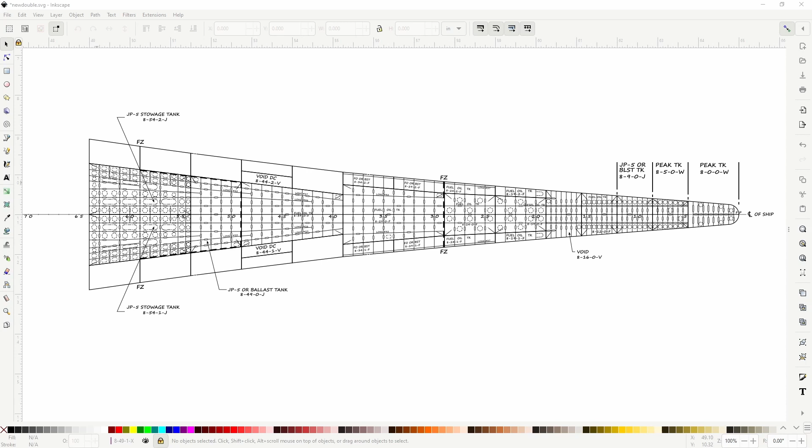The new objects are looking good. I really like the way the space pointers look now, so you can see where all the spaces are pointing inward. I've identified longitudinals now that are coming in, which is something I skipped on my original draft.

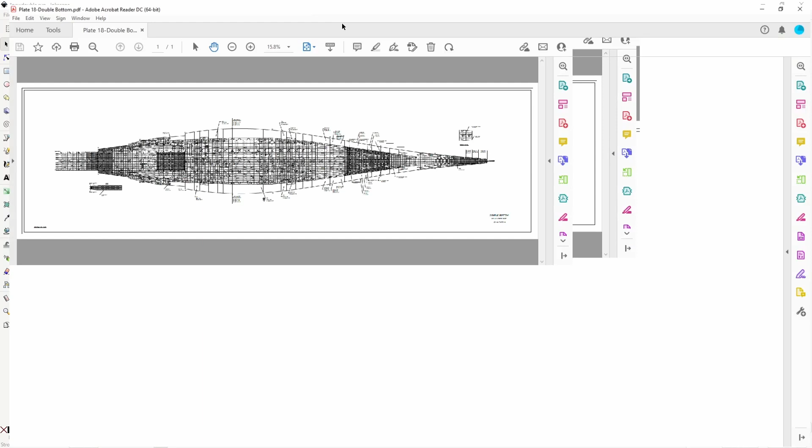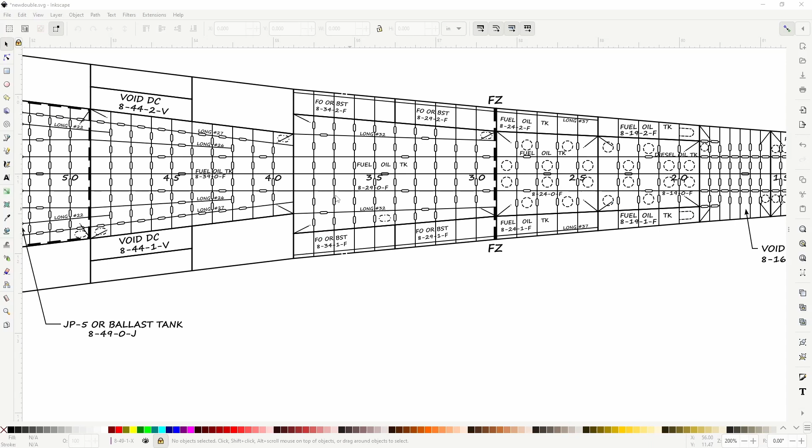If you take a look at the original draft right here, you can kind of compare and contrast - there's no longitudinals. These are kind of cattywampus because the way I put them together was a little, I'd take a line and just stretch them out, and it didn't look very good. The new version here looks a lot more clean. These actually stray down in a line, which is nice.

Of course, the plates, the lightening holes, and the access ways for the JP5 is here. One of the things I do want to share, though, is because these plans were declassified, there are certain aspects of the plans I think that are interesting.

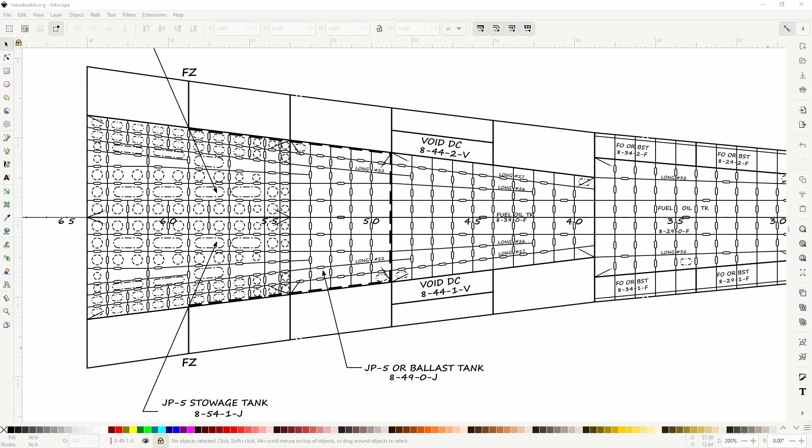When I was working on the blueprint, copying from the original, I noticed - I'll show you in GIMP real quick - I noticed that the colors sort of dictate, I don't know how well this is going to show up on YouTube, but you can see there are places where it appears to be whited out. You can tell they've covered some parts of the ship, pointers and stuff. You can see where the arrows kind of go in.

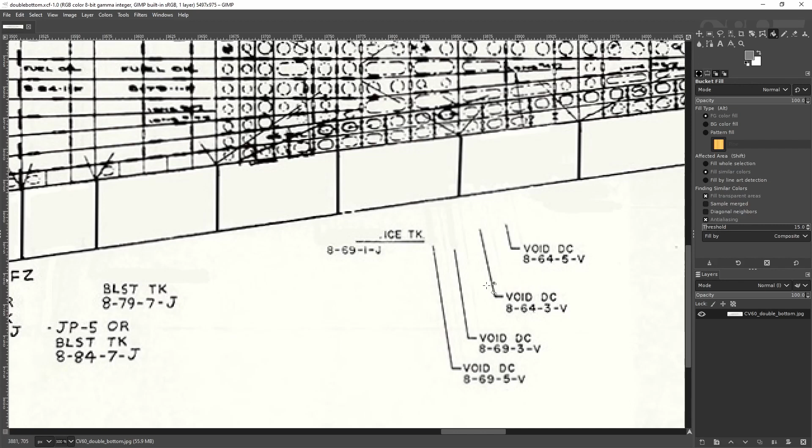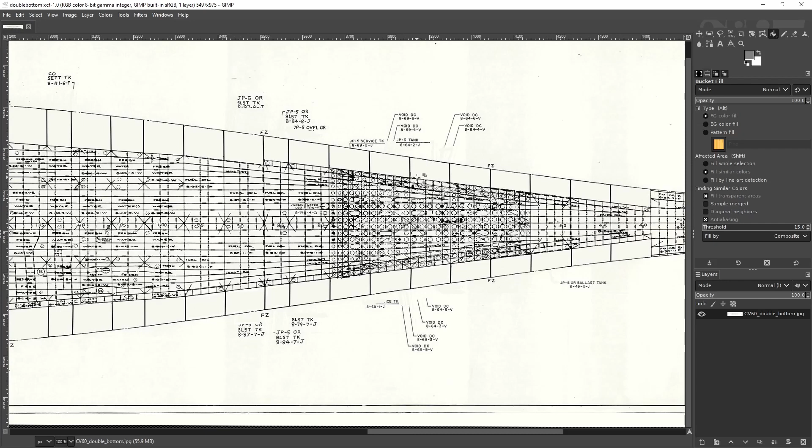So there's more data here than what's showing, and it's probably pointing to these big blank areas that I like to call phantom spaces. They've been painted out, redacted, and the reason why is most likely because the ship in question has an armor belt around it, and they still make carriers with this armor belt on it.

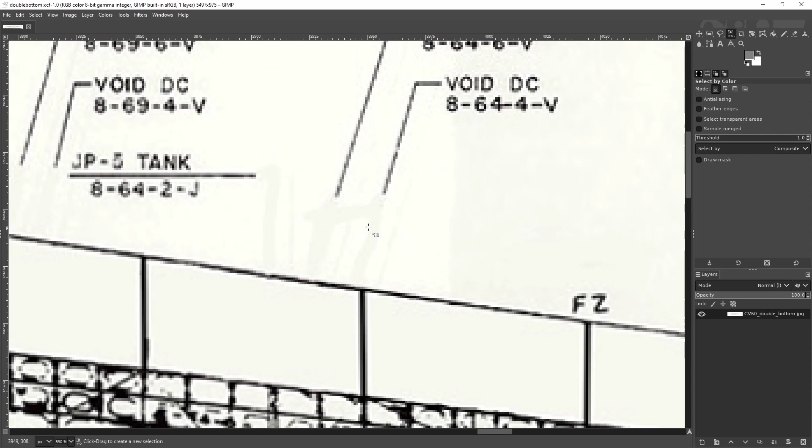So it's not going to be real conducive to show how the bottom parts of the ship underneath the waterline are armored, to give that information out. But what I thought was cool was while I was looking at this, I noticed - it might be hard to tell - you can tell there's lines that are getting cut off and going into the system, or going into the ship. I decided to try coloring this off-colored whiteout, to see if I'd be able to see what has been redacted. And if I do that, you can actually see, yes, there's all kinds of stuff.

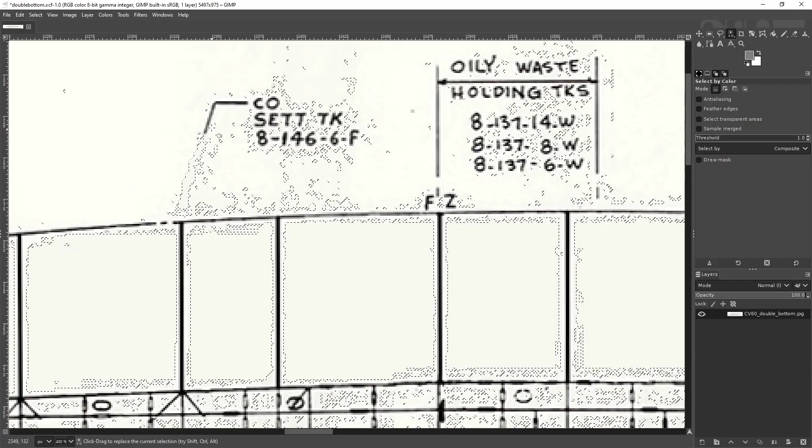It's like all these spaces have all been redacted, all been painted over. You can see here where the arrow came inside and was painted over. You can see all the spaces down here that were painted over, the arrows here. But one of the things I also found out is there's supposed to be something written here which is gone.

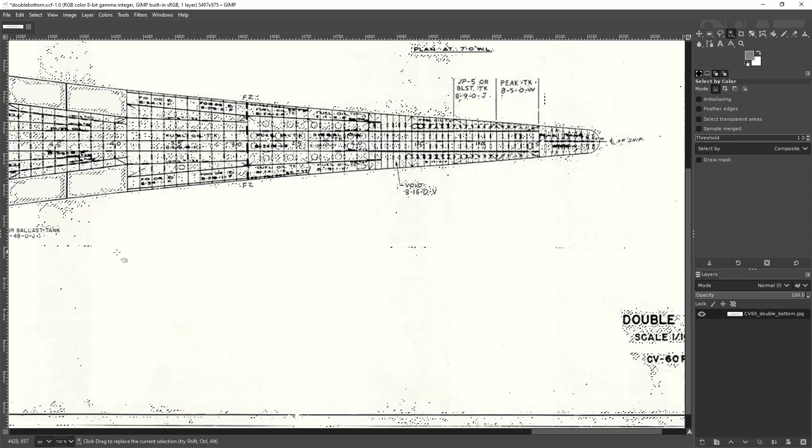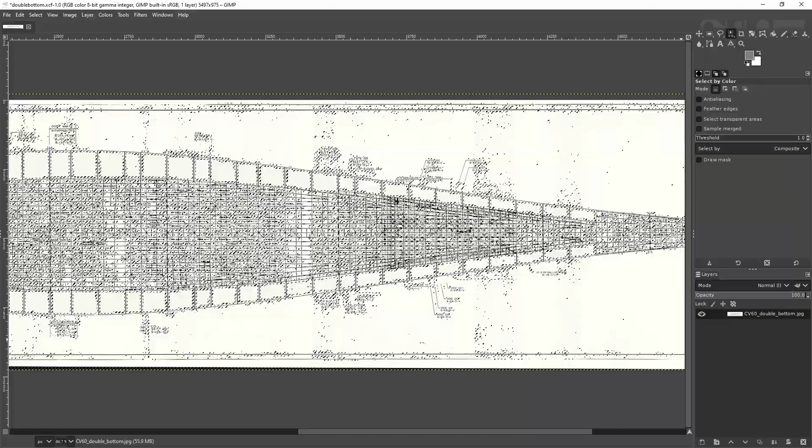What's cool is you can also tell that this over here has some sort of data sheet which is missing, most likely a list of spaces, but that's kind of cool to discover. There's something written here. This was a neat thing I discovered when looking at the double bottom - you can actually see where all the spaces are that have been removed from view. I kind of want to put some of these back if I can find out what they are. For example, if you look at the damage control plans here, they also show the phantom spaces too. These are just unlabeled, so you don't know what's inside them.

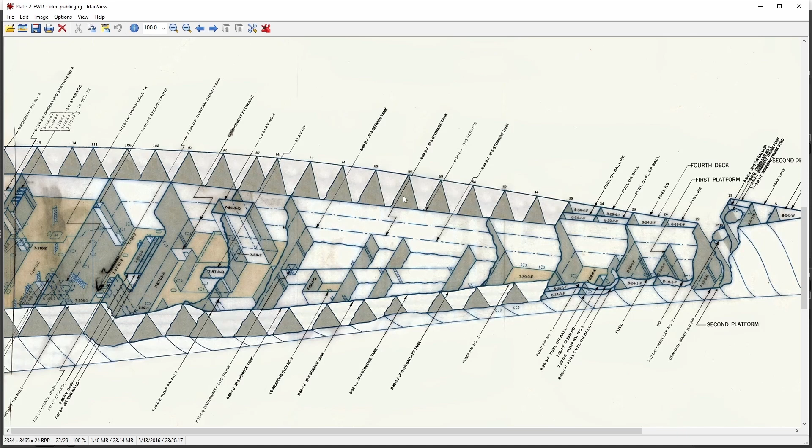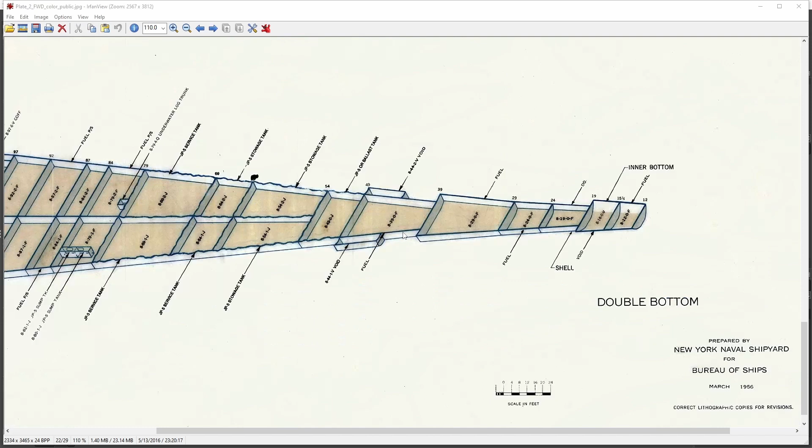This largely matches what is in the deck plans themselves. However, from time to time you can see a space poke out. For example, even though on the original blueprints this right here was voided out, this 8-44-2-Victor is actually in the damage control plans here. So I popped it in - it seemed rational to pop it in there. But still, it's kind of an interesting little discovery I thought I would share.

Other than that, let's see what other stuff I've come across.

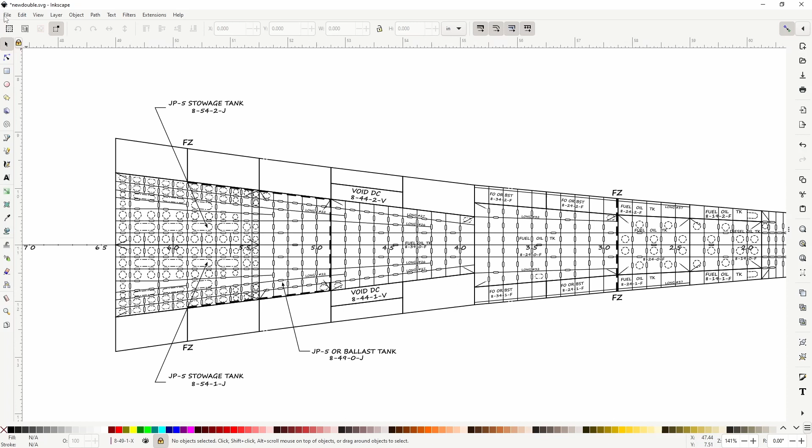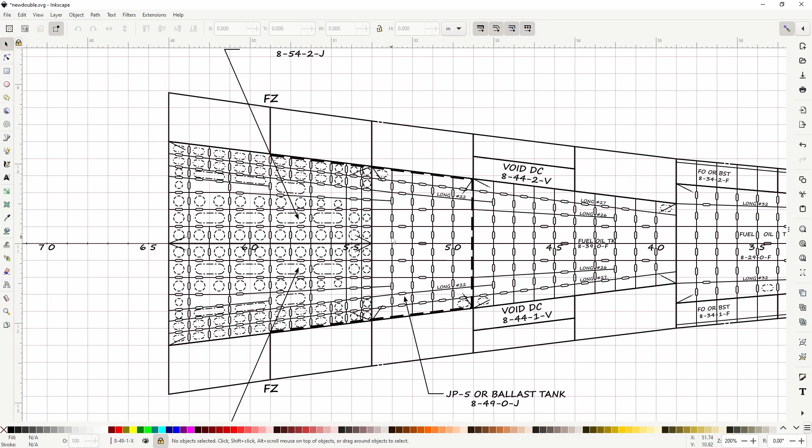Another thing that happened is I nearly screwed up my y-axis again. If I turn on my grids here - this is the longitudinal one that I messed up the scaling on the first time around. Almost messed it up again. I originally calculated the space between the longitudinals here as being 3 feet 4 inches, and it turns out that it's actually 41 inches, 3 feet 5 inches. I don't know why 41 inches is what they chose, but having it 1 inch short, I was actually running out of space in the ship.

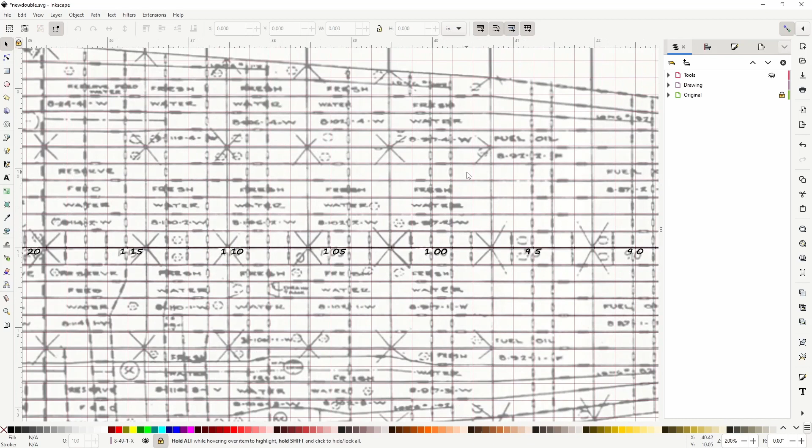So on the edges, they were going more and more out of whack. So if I pull up my original here, you can now see that the longitudinal outlines match so much better now to the frame of the ship, which is nice.

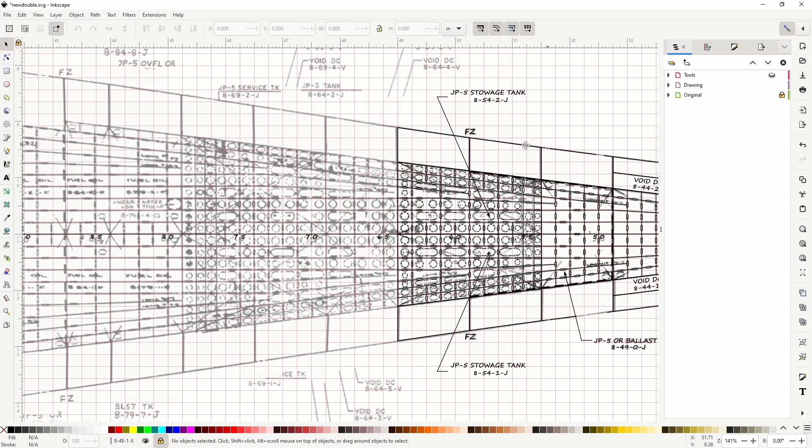So that's pretty much the update. Mostly what I'm doing is just trucking along, filling out the spaces and working my way down. One more thing too - the way I'm organizing this is that each space gets its own layer, and when I'm done with the layer I lock it.

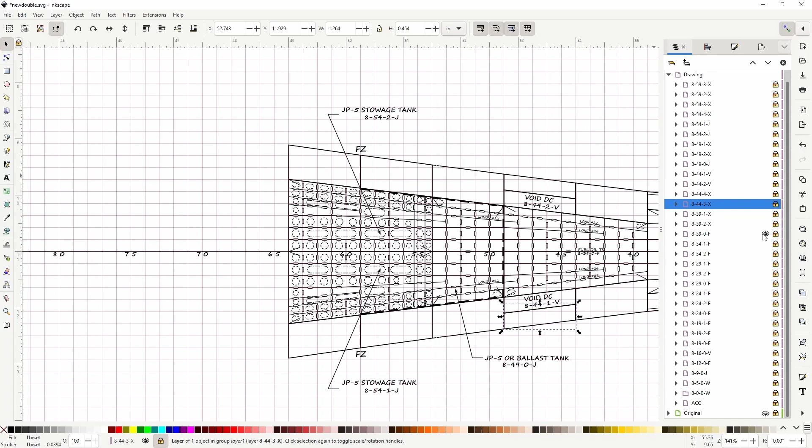So when I'm complete, if I close this out right here, I can make spaces disappear just by muting them - you can see there's one space right here, here's another one. The phantom spaces I mark with an X, so I know they are not real spaces, but they are sort of accounted for on the ship. The idea is that I should be able to take any one of these spaces out and render it as an individual item, or process that particular space on its own. So each space gets its own layer, which is cool. I also have the center line that I'm working on as well.

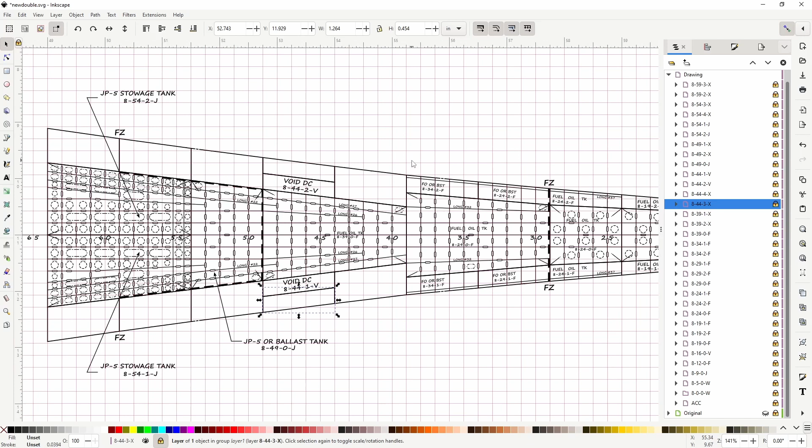But that's pretty much it. I know it's not exciting, but once I start getting up to the higher decks, I can probably find some more interesting things, because this is basically just tanks - a bunch of fuel tanks and water tanks and voids. As soon as I work a little further on, we'll probably see some progress and some more cool things. Anyways, that's my update.